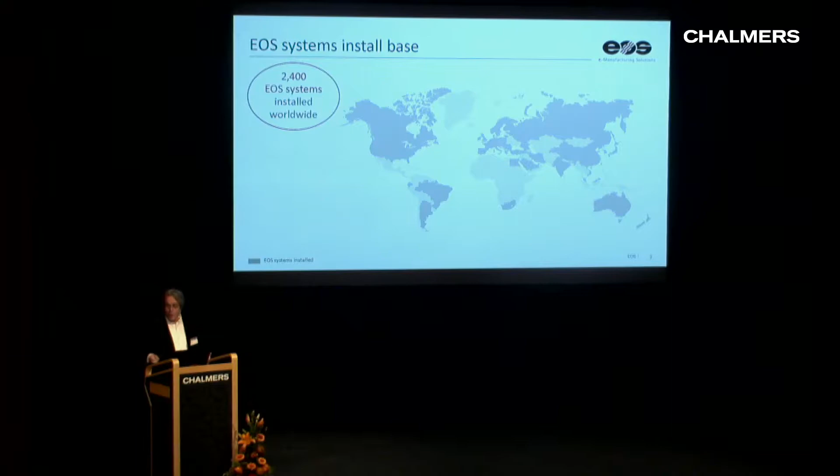That's one way of describing the size of the company. We have about 2,400 systems installed worldwide. Not all of them are operative, because some of them are really old. Maybe some of them are already in museums, but still, it's one way of describing the spreading of the technology.

40% of these are metal systems and 60% are polymer systems. There's a natural reason for that too, because polymer systems were there first, and the metals came a little bit later, and also the application fields are slightly different, because plastic technology is still used a lot in prototyping, a little bit in manufacturing, and in metals it's vice versa.

So we are experts in plastics and metal AM technology, and we want to innovate with quality, because the quality is the key to manufacturing. That was already chosen as our guideline years and years ago. Our mission is to provide industrial grade materials, systems, processes and services - not machines, but solutions, and also services around the solutions.

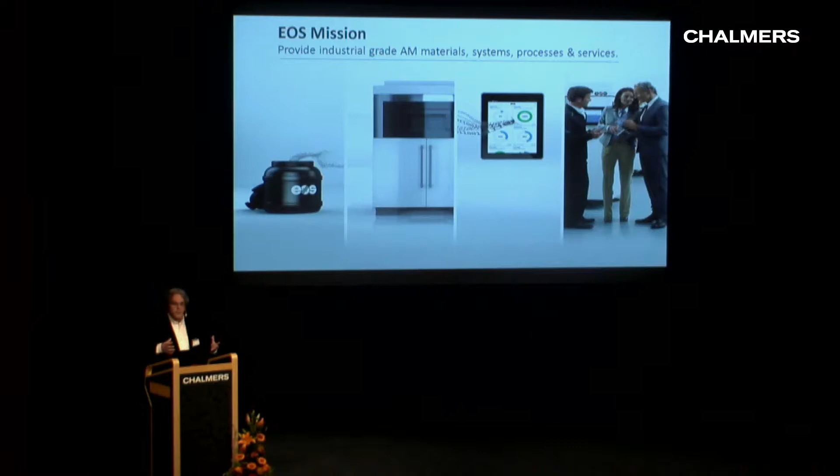Our vision is that additive manufacturing technology is an established and efficient way of industrial production. So this is our vision, this is what we are aiming for, and this is our driver. We do our decisions based on that.

So now we go into materials. I'm a materials guy. I have worked with metal powders all my life. And also, because I have a dual job - I have a corporate job and also a local job, which is located in Finland - and that's all metal materials.

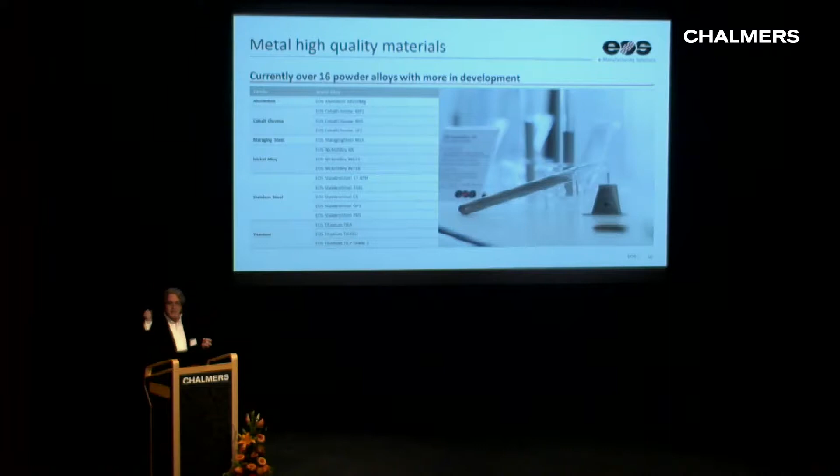Our way of introducing new materials in our systems is that we don't sell powders. We want to connect the powders with the machine, with the process. This is what we call a holy triangle. Because we are very much concerned with part properties, we believe our customers are interested in the properties of the parts coming out of the machine, not the machines themselves or necessarily the beautiful packages of powders. So we've introduced this kind of materials to the marketplace, fully understanding that the world contains hundreds, if not thousands of different alloys. But because we want to make the solution work, we do this carefully. We don't launch powders, we launch materials with properties, identifiable properties.

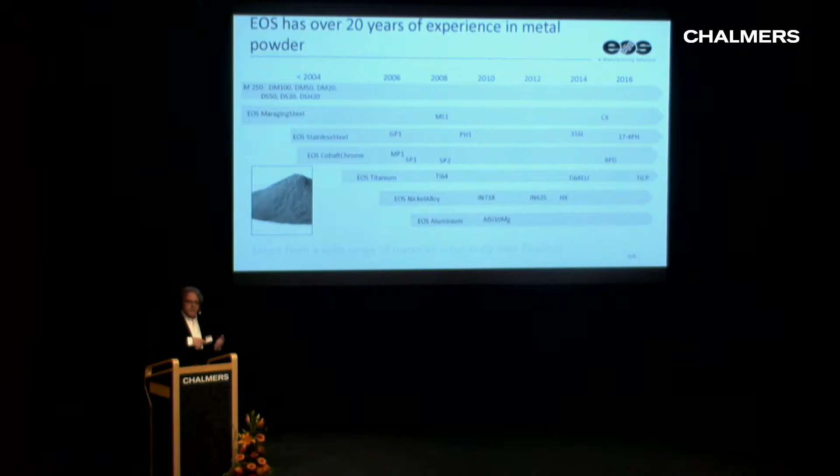This is a little bit of the timeline. Before 2004, it was the era of old, previous generation technology. It was CO2 lasers, and perhaps not all the other components in the machines were fully matured. I'm not saying they're even today fully matured, but much more matured. In 2004, fiber lasers were introduced, and this opened a completely new world, because in principle we were able to process whatever material, all metals and even ceramics. After that, we launched all these material groups.

How we do that is, of course, because we are a small company, we have to listen to our customers. So we take the voice of the customer before we start anything. Then we develop our solution triangle together with our supplier network. We have several suppliers for powders. I would rather call them partners than suppliers, because our relationship is very intense. We want to help each other, and we don't go into price competition easily.

And we offer the customer value, which contains kind of control of raw materials. This is a very often underestimated thing. How do you control your raw materials? Because it's not just about particle size distribution or chemistry—there's much more to powders than these, and a lot of it is kind of in a gray zone. Nobody really knows how to specify a perfect powder for a certain application.

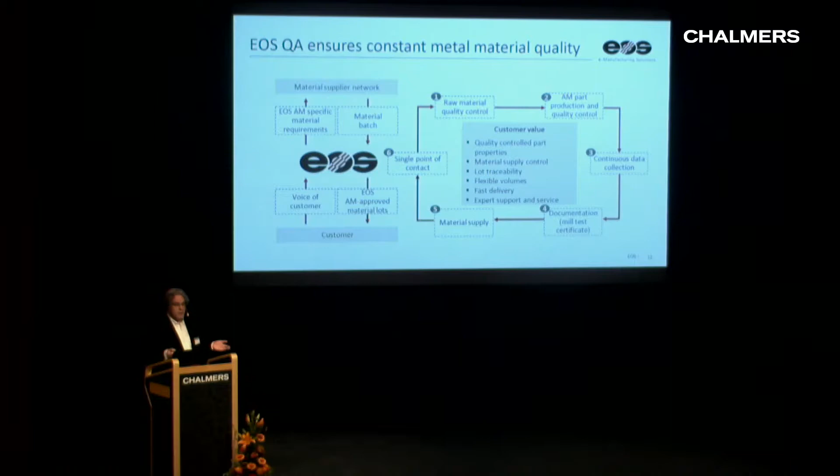So our way of doing this is that we have partners, and we take control of our partners. This control transmits to our customers as well. We collect data all the time, so we know how our suppliers behave. Of course, lot traceability and flexible volumes come automatically into the question, because this is the customer demand if you want to operate in this business. There's all kinds of customers—very small service bureaus and also large OEMs—who have a little bit different requirements for their materials.

As I mentioned, we don't do parameters, machine parameters—we offer validated processes. We have internal testing standards and standard operating procedures. How do we do that? We have categorized our offering into technology readiness levels nowadays, because that's the language known to industry. We offer at the moment two different main categories. What we call core is the less mature processes, and then we have full industrialized process or solution products, which we would put in readiness levels 7 to 9.

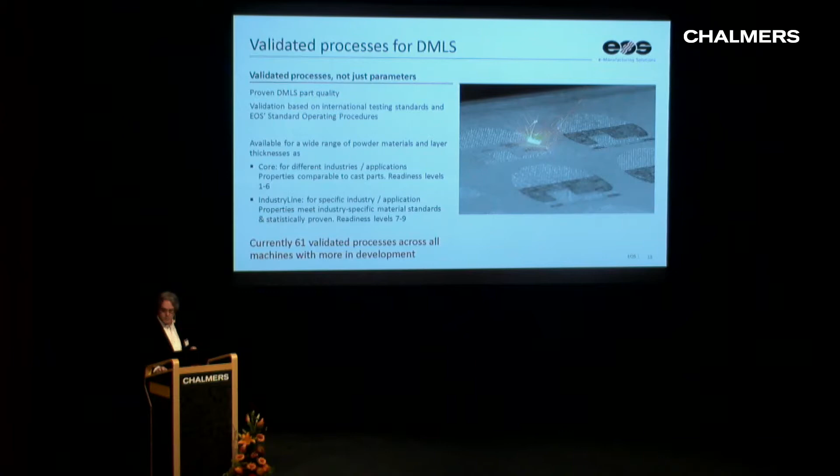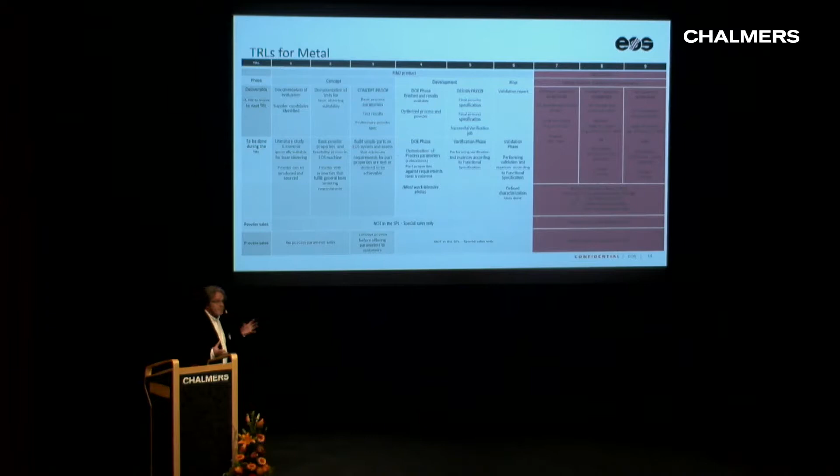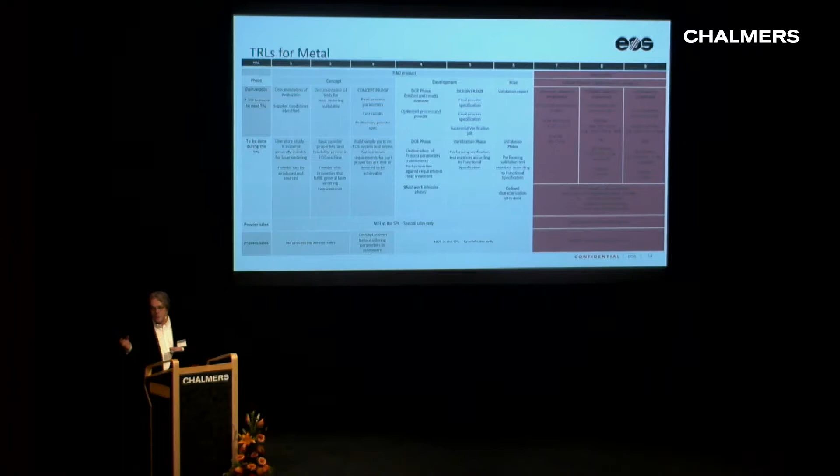That's a little bit of a complicated picture. I don't think we should go through it, but it's a brief description of what readiness levels might mean for us, and also what customers would get from us if we go into discussion. Because there are different demands on the market, not everybody wants fully developed processes. Some people want something less, or a little bit more flexibility in further development, but we want to enable them to acquire the technology fast. Technology TRL levels is one of the tools we use for that.

So, what is EOS Finland? It's a materials and process development competence center of EOS, located in Turku, Finland—Åbo. From Stockholm you can take the love boat and go there overnight or over a day. I'm the general manager. It's about 65 people—R&D about 24, and then we have a metallurgy lab, quality team, supply chain, procurement, admin, and quite a bit of temporary workers.

So we are dedicated to developing, procuring and supplying high quality products—metal powders and processes. We take the German machines and make them work in a way that the outcome has properties that our customers want to have. So we create a specification, material procurement, packaging, labeling. This is the supply chain work, and this is considered to be the core competence of the success of the complete EOS group.

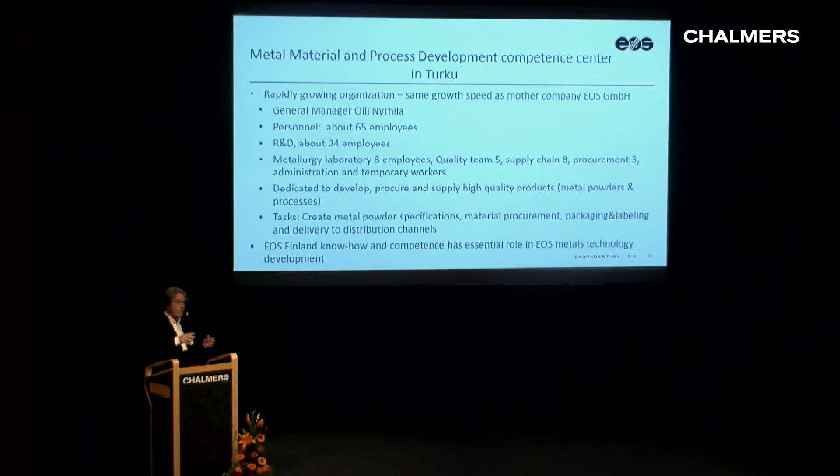So, why do we exist? Why does a German family-owned business have a subsidiary in Turku, Finland?

There's a natural reason for that, because the metals technology was developed in cooperation. So we approached EOS in the beginning of the 1990s, because there was already some metal powder know-how, materials know-how. We approached EOS to put our competencies together and develop a system first, and then these processes to use only metal powders. So put in metal powder, get out metal parts. This was unique at that time because this kind of thing did not exist at all.

As a result, in 1994 or 95, the first commercial system in the world which utilized this principle was introduced. Later on, it was part of Electrolux, but Electrolux decided that this is definitely not their core business. After some complicated actions, EOS acquired the development group and set up EOS Finland as a company.

So first in cooperation, then inside EOS, doing basically the same stuff. Functions include global sourcing of metal powders, metal powder manufacturing—what we call manufacturing is usually mixing and the packaging and the labeling and such.

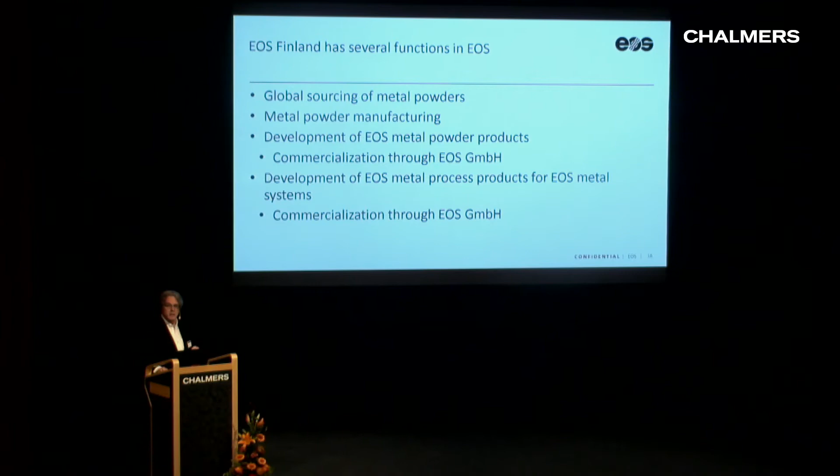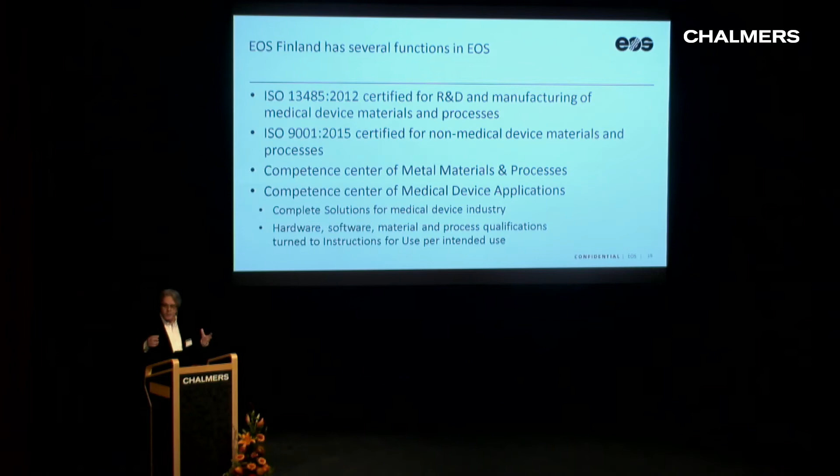We have a couple of quality systems in place, ISO 9001 and the medical one, 13485, because we have developed the additive dental solutions for EOS. So they are actually Finnish solutions operating in German machines. To be able to do that, you have to have the medical quality system as well.

Going back a little bit to the offerings and the TRL levels—to satisfy the need in the market, we have divided our offering into 3 different groups. I'm talking now about R&D related actions. We have the conventional metal materials and processes group, who fully develop powders and processes and put them together and offer the solution.

We also offer validated material properties with all the statistics which go into the statistical proof that the case really is as we say it is. Then we have the medical applications development group, which in addition to the previous one also offers authority approvals in the region that we want to do business in.

Then a new thing we introduced this year is custom materials and processes. That's a special group, a kind of R&D people working in a little bit different way with customers to initiate something completely new. If somebody wants a new alloy developed, we go in and make the TRL from 1 to 6 work, and also connect this to the powder offering, and offer this kind of project to our customers.

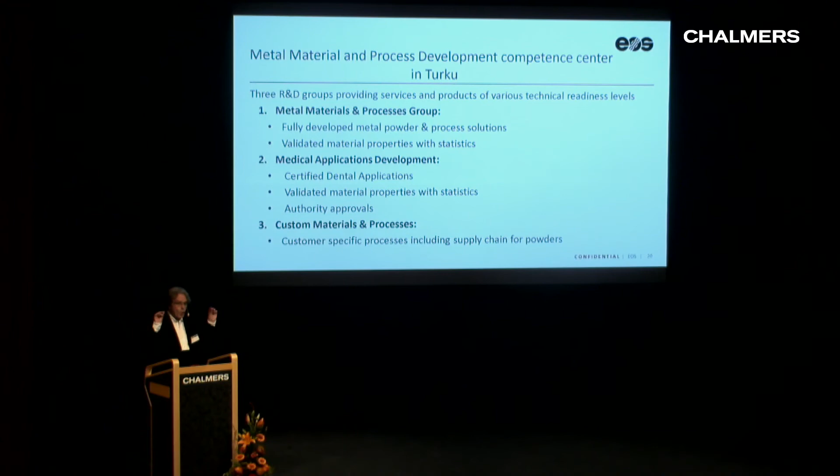We have a lot of machines to be able to do that—basically all the commercial ones. It's a really large machine park. We have a lot of 290s and 280s, and even 270 machines, M100s, and both kinds of M400 machines. I won't go into the definitions of what the machines are, but I'm sure most of you know what these machines are all about.

In addition to that, we're also very much concerned with controlling the process. That's why we have melt pool monitoring systems and also OT monitoring systems where we get information from the process, and later on connect this into behavior in the materials, maybe defects, and one day, maybe, closed loop control of the process.

We have conventional heat treatment machines and heat treatment furnaces to do the full metallurgy, because heat treatment is very much in our scope also.

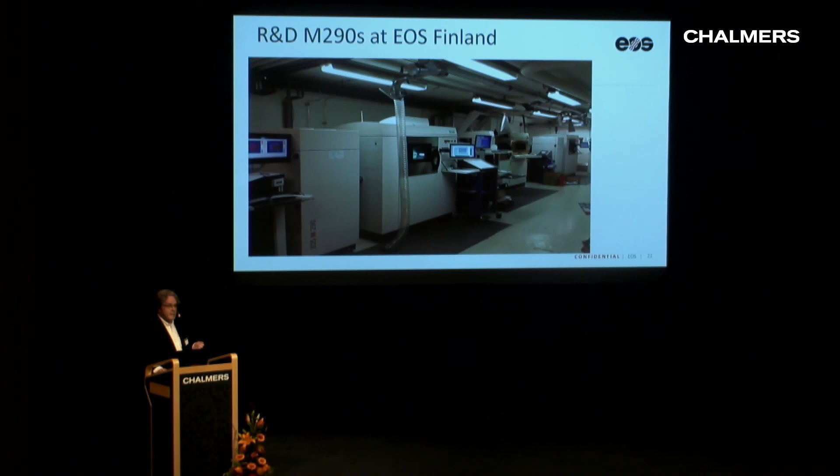A little bit of examples—that's how R&D dungeons look like. I'm sure many of you know how they look: small rooms full of machines. And that's a glimpse of one of the big machines.

Okay, so I'm very well in time. Yes, but that's all I wanted to say. Thank you.